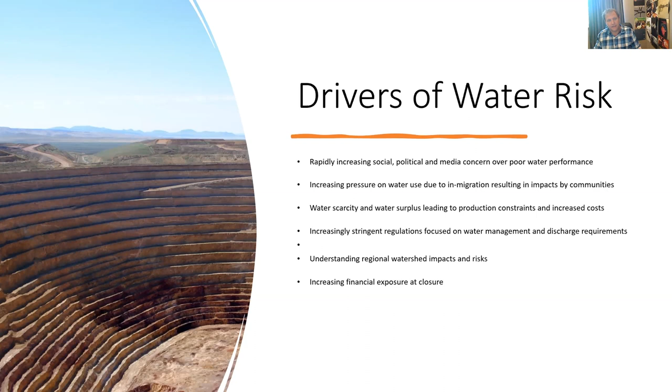So a big driver for this, I mean, it wouldn't be a conversation without talking about costs, but costs at closure in particular have escalated to unsustainable levels, or very challenging levels in most cases. And understanding those is something that we want a longer runway so that we react less. And reactivity is the killer. And I'm going to talk a lot about reactivity as I progress through the slides today.

Following that, what do we see in industry trends? Well, we see a shifting industry, especially in precious metals mining and other commodities. Perhaps we're seeing that shift in the regulatory space, but in our space, we're seeing a macro shift in the type of material, the type of ore that we process. We're seeing a shift away from oxide mineralogy into sulfidic mineralogy, sulfides in particular.

And we know that those have challenges related to the scale that we operate at and the environments that we operate within, or the locations and physical geographies. So we're seeing movement into places that have more challenges around surplus or deficit of water. We're seeing the sulfidic mineralogy impacts that affect water quality. So it's quality and quantity that we see as challenges.

So we need to execute a multidisciplinary approach. We know that it's a combination of strategic and tactical. The strategic elements look at the long-term way that we operate, but the tactical has to be backed up in sense and in science and in engineering in most cases. And we're seeing the need for greater technical capability with much more targeted tools that can help us to predict what the mitigations and engineering constraints might be.

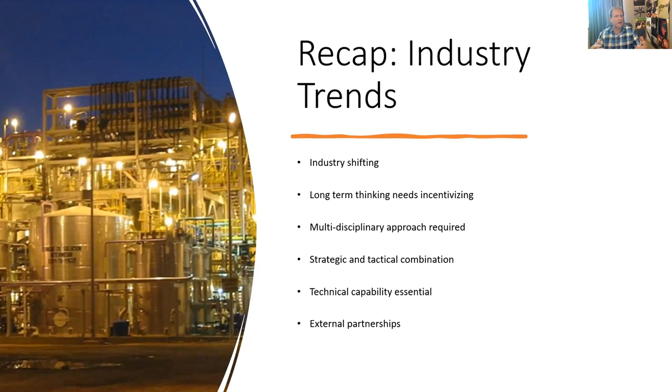So a piece here that I've added is around external partnerships. So we can't do it on our own as a mining company. And I'll talk a little bit about our strategy around what that external piece looks like and how we've come to develop some of the technologies that we've developed.

And then the specific parameters of concern that we're looking at: obviously metals and metalliferous drainage, saline drainage, those are things that we need to be controlling. Particular elements around nitrogen, ammonia, nitrate, nitrite. These often crop up as things that we need to solve for in our treatment strategies. Sulfates, it's been around about 10 years as a pretty big driver, and that's going to be one of the case studies that I talk about today, how we use membranes to solve the sulfate issue.

Obviously, very rarely do we see these things on their own, and so that's something I'll talk about from a strategic engagement perspective: what is the technology that you want to bring, you want to commercialize? Is it specific? If it's very, very specific, mining has a pretty wide range of challenges, and it's very rare that a very specific technology would be something that we would want to add. That's why membranes, as an economizer and a bit of a catch-all, are something that you would probably want to integrate into your flow sheet, because if you can treat things at lower volume, higher concentrations, that's always a win for us.

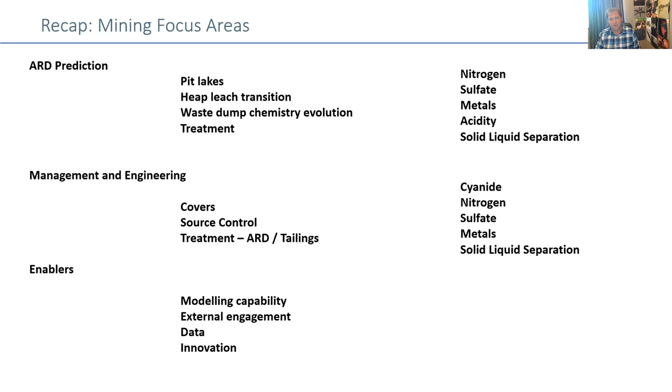So another couple of slides here around just cementing why are we doing this and where does it sit. We own the liability. So from an organizational liability perspective, these liabilities can be very, very long-lived and very, very expensive. So that's why we want to look very closely at solving the issues. And we want to look at it from a number of arrows in the quiver. An ounce of prevention is worth a pound of cure. That's on my next slide. But those are the elements that are really important to us, and that's some of our guiding principles around how we look to minimize, and then if we're going to treat, what's the innovation and what does it open up for us in terms of the opportunity to both make money and, at the same time, develop the business.

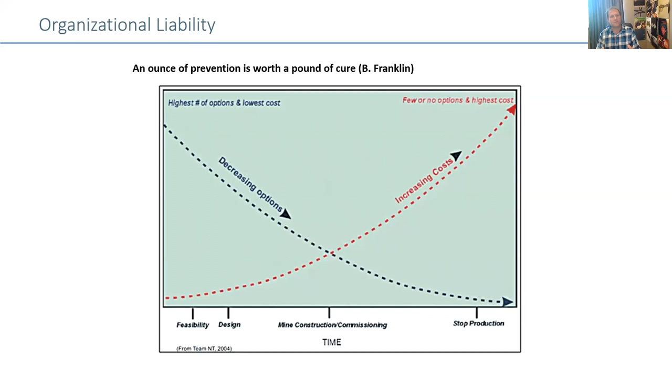And here's a pretty typical cost curve that drives us, and like I spoke about at the beginning, what we see is these rapidly increasing costs later in mine life and in closure. And in those locations, we don't have the economic models in place to be able to adapt to those increasing costs. So it's just cementing that recap here that this is a significant driver for the business. There's a lot of opportunity here as well, but those targeted areas, we've got to be focused on what they are and how they affect our business.

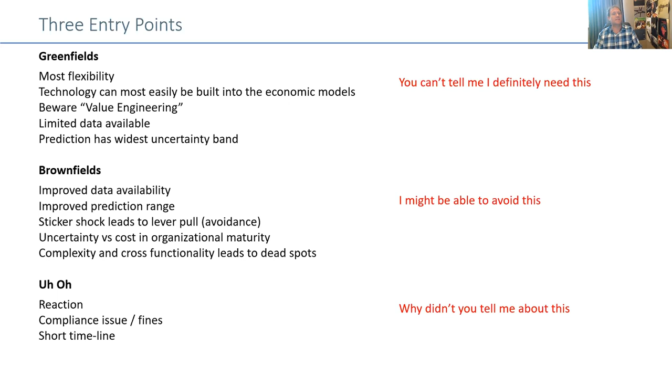Then brownfields, I might be able to avoid this. I don't want to be the one to pick up that can. Somebody else didn't pick it up. What are my off-ramps here? How can I get off this track and minimize those costs? And then the last one is, well, hang on a second, I didn't know about this. And that's a real difficult one, because often the messaging or the communication pathways aren't there. So again, coming back to my function, making sure that we're consistent and persistent in the way that we approach these things.

So the next one here is really just taking those concepts a little bit further. Water is not our core business. We're going to find those off-ramps. We're going to find those minimizations. We're going to take time value of money and we're going to delay. Those are the ways that we have a challenge. So what I'm trying to explain to folks is find your ways in and develop your expectations of where it might work.

Coming in at the end, I think, is where a lot of folks saw opportunity. Wow, there's companies that have got huge problems here, and our technology can slot in some part here, and we're going to be able to hit go and get it done really quickly, and we'll make tons of money. That is the last resort, and is not a good way of doing business. So yes, that has happened, but I think people came into the business when there was a lot of consolidation in the water industry, expecting that to be the way forward, but not understanding that in mining we've got to rationalize these things and make sure that we're doing the right thing.

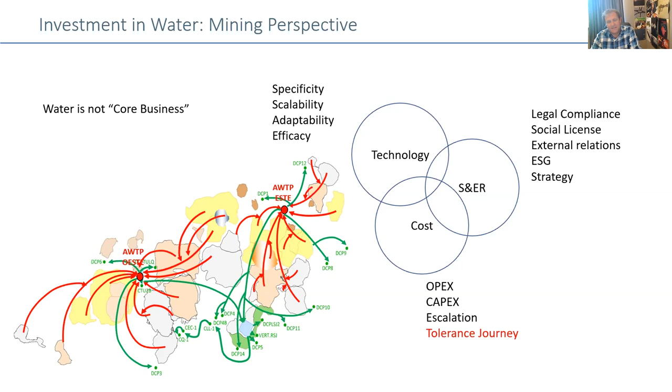And then what I alluded to previously is where is this company at in terms of their tolerance to those costs? The point in the middle here, the intersection of all of these, is the ideal situation, but we very rarely land there. So what's that journey? Well, in the beginning, we might have an S&ER goal, and then that leads to a technology interaction. So we go, well, where do we fit there? We can find that spot, no worries. Depending on the project, cost isn't really considered at that point.

But as you move forward, the technology and the costs start to be considered, and you start to value engineer, and you start to think, well, what do we really need to do? What's the minimum that we can do here? And then when we get to the certainty end of things, what typically happens on that far end of the scale is, if you do take the off-ramps and try to avoid and take advantage of delays, eventually S&ER always wins. You've got to meet your obligations, legal or otherwise, or in our case, our internal standards.

And that's where there's a significant interaction with cost. What I've said here on the right-hand side is, at the end of the day, our obligations always win, and then cost isn't necessarily a driving force. The picture I've put here is one of the mitigation strategies that you might see in the mining industry, where we can cover the material that's causing the issues. That can work for a significant period of time. Whether or not that is acceptable over the longer period is a different question. But those are some of the things that we might end up doing.

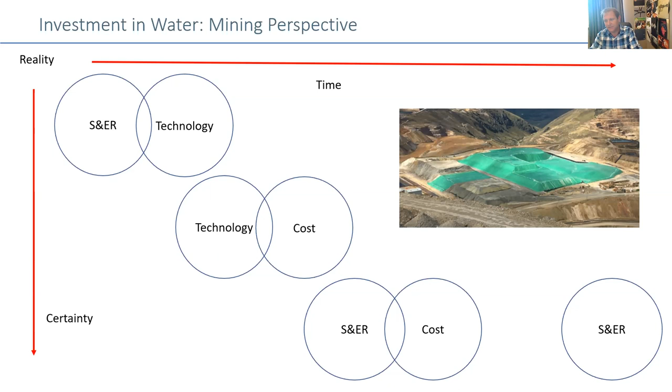So when we start in a project and we go, right, what's our tolerance? What's our feed water quality? Where are we at? Often we don't have that level of certainty, and you see this evolution, this development, and then this escalation. And that's when you've got to understand how we manage that in terms of the development of the technology. Again, to reiterate, multiple off-ramps.

But the off-ramps are pretty clear, right? Industry macroeconomics: we've got changes in gold price, precious metal prices. That can change the economics of what your whole project looks like. That can end that project or make it substantially different. Production elements, restrictions, those elements as well. Closure: we can develop closure cost estimates and understand that might not be something that we want to tackle. And then obviously cost.

And then another one here is regulatory relief. There may be elements there such as site-specific water quality parameters, permitting, working with our regulatory stakeholders to make sure that all of those things are taken into account. So that's a bit of a journey to how we innovate, right? Or how we bring these things into the business.

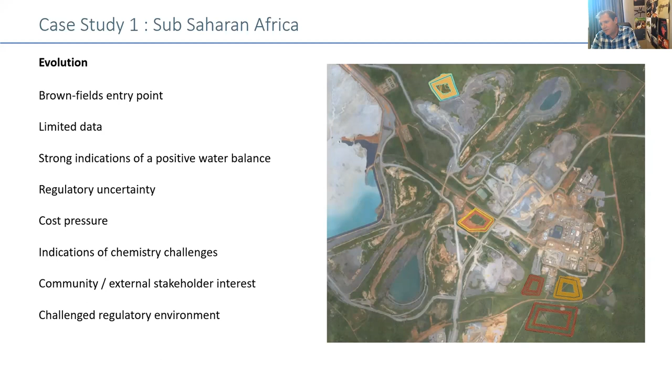So in the development of the process here, we took a few off-ramps. We engaged consultants. Consultants didn't really have that connectivity into the business. So that's why, and that's where I come in as well, is making sure that we own these outcomes. We're accountable for this stuff, and we can then get the consultants to be more useful to us rather than them coming through and trying to solve something that we ultimately don't like the answer for, or we have the ability to ignore. So Newmont says, no, we're going to have that internal accountability for this.

So that's where we developed that. We got a lot better through that process. So we didn't have that cohesive strategy at the time, accompanied with lack of data and a lack of detail. It made it very difficult to make investment decisions. And then the investment system was in its infancy and was being developed. So we started moving water around. We challenged the regulators on a couple of things. We reworked some assumptions, and in the end, the problem didn't go away. In fact, it got a lot worse, and that's where reality sort of hit us.

And we had to deal with some permits. They weren't necessarily withheld, but the permits, they said, well, you're not really demonstrating that you're fixing this issue. Now, we didn't have anything that went beyond the fence, and we didn't have anything that required fines or anything of that nature, but we were able to manage it internally. And then we became very clear that we were not going to be able to manage it for much longer.

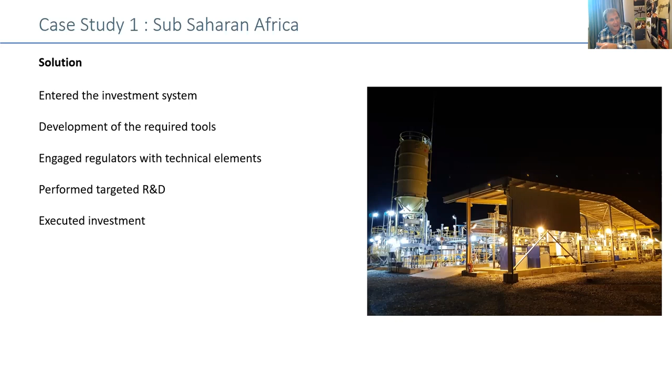And we're solving that issue with cycling up RO brine and things like that that are typically considered to be a bit risky. So we've got a lot of credibility out of it too. And now when we engage with the regulators, they know what we're capable of and how we can do it.

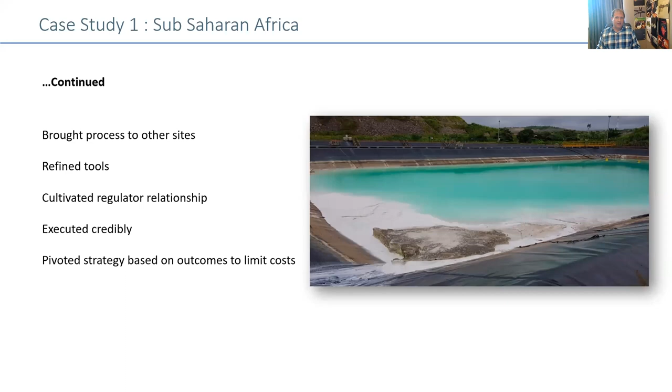So directly pivoting on that. We had a very similar situation at a site in the same area, but we developed the right tools. We knew what we were facing. We collected the right data, made the right predictive elements, cross-functionally worked with everybody. We tracked our performance after we executed the fix, which was a new strategy that takes those larger fixed plants and pivots to mobile plants.

Now, we could never have put mobile plants in if we didn't build that fixed plant in the beginning. So now that's that scalability. Now we can scale these things as needed without having to spend huge dollars, reacting to the cost pressures that we have in the mining business because it's not core business. So that's what we did. We could see that we had this very, very high rainfall year. We were tracking very, very high.

We implemented a mobile RO system, and we didn't have an emergency. We didn't contaminate any water. We didn't have anything over top. We didn't have to load our TSF. We executed exactly as designed, and we were able to go back to the regulators and say, hey, thanks for your support and permitting that on the fast track. We solved it. Now we're good.

I'm hoping that the message coming across here is just how the planning aspects and that technical engagement in those planning processes and investment systems, just how important it is to get that right. So that's really where my point is, I guess.

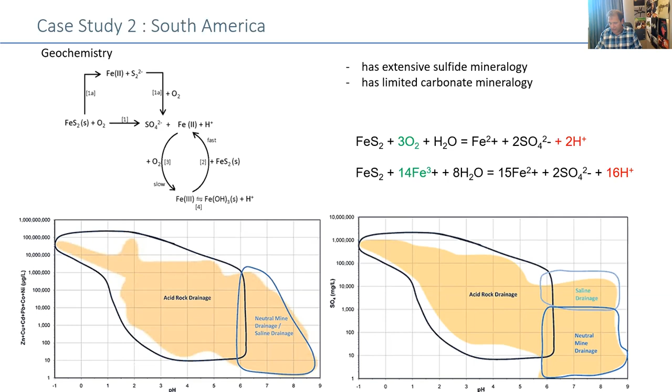So here's what we're sitting in with respect to the potential water quality that we have, acid rock drainage and saline drainage. The fact is we've got to treat those solutions. So again, brownfields entry point. The site had operated without fully understanding what the potential was for some of the water quality elements and how they might evolve and where they might land.

So, same as the previous site, we were observing these things, watching them happen and just hoping that they would either stop or go away, or this was just an anomaly and it wouldn't be continued into the future. At the same time, we had a lot of regulatory change. So real compression of what we were observing and measuring and the regulations that we had.

Again, cost pressures are fairly ubiquitous, so the plants that we have here aren't going to miraculously make more money. So we've got to make sure that we can limit the costs and target the right technology here and be as adaptable to the future conditions and state as we can. Obviously there's a lot of community stakeholder engagement and interest in this location. And again, large scale, very, very large cost.

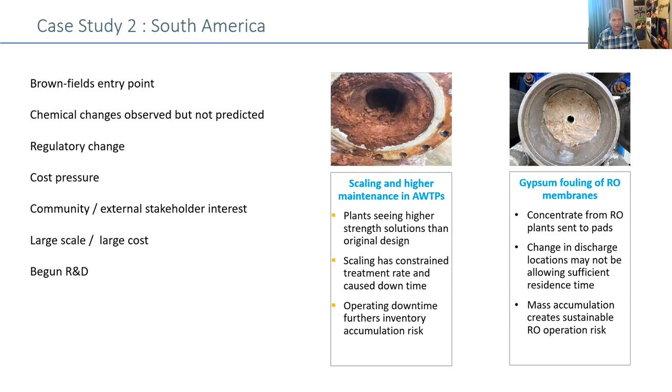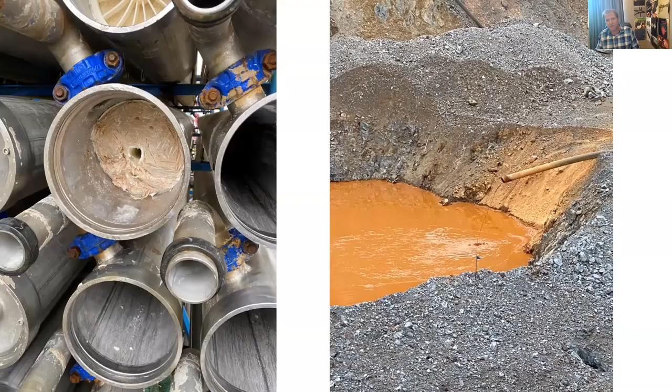So here's a few photos. Some of the sludges that have been produced as a result of this acid water certainly have an impact on our ability to manage water around the site. We've got to make sure that we're fixing this stuff. So there's a lot of sludge that's being developed. You can see lovely pictures there. You can see what the membranes are doing. You can see what happens when we can't get all the water out because we're constrained by the chemistry. Right now, we can seasonally manage this, but these are the impacts.

Anybody who knows anything about ARD can probably predict the water quality that you can see in those photos there. So next phase, development. We enter the investment system. We largely entered the investment system not because of the problems that we were seeing, but because new projects required changes to those water management and water treatment systems, and we knew that adding additional resource to this site would require changes because the systems can't tolerate that expansion.

So we knew what it needed to be, but we didn't realize at the time just how much we had expanded beyond the capabilities of the existing system and how close we were to not being able to manage water effectively. Again, lots and lots of consultants involved. The consultant go-around, everybody's doing all this work, but no one's really got a cohesive strategy here. So that was a bit of a challenge to pull that back and get that on the right track.

And then looking at operational elements. So we were seeing these sludges turning up. We were seeing inability to meet our water treatment KPIs. So we were band-aiding a lot of that, and some of that made things a lot worse. And then we weren't engaging with what those fixes were and what the changes meant.

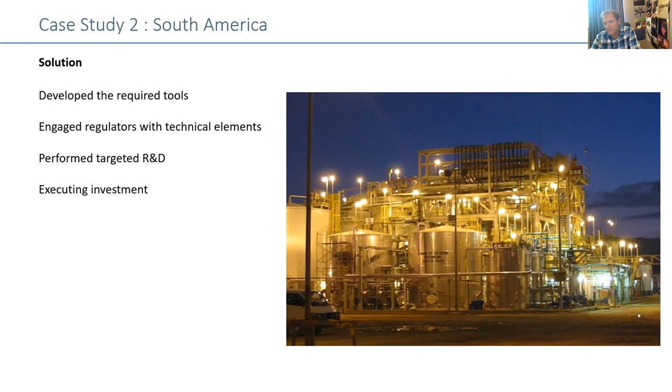Are you flexible, scalable, and adaptable? How does that work? Are you market ready? Do you require development? If you require development, probably going into a site isn't the right place to go. Coming through the innovation pipeline is probably a better location. And then what's the level of specificity that you have with regards to those focal points and the tolerance to the costs? So where are you at?

So on the right-hand side there, you'll see there's a photo of me and a lab manager down in Peru operating this acid RO plant. And so I'll leave you with that.

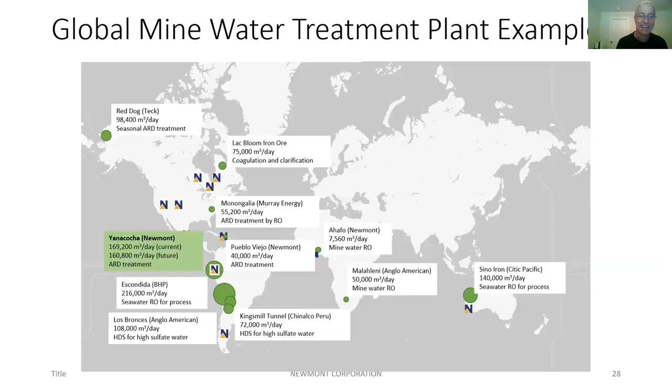Well, Jay, can I ask a specific question? In one of your slides, you just snuck past what I thought was a horrific, exciting image of a membrane pressure vessel and some cement and chisel marks on it. Was I seeing that correctly? Yeah, you were. Oh my God.

So for those of us who have had the unfortunate pleasure of dealing with this before, that membrane there, and everybody knows this as well, right? You try and rip those membranes out of there that are glued to the inside. You start streaking and damaging the inside of those vessels, and you can have all kinds of things go wrong.

So there's stainless vessels in this particular location, but that membrane there weighs 36 kilograms, goes in at about 8, and it's all gypsum. And we tried really hard to get that one out of there, and we ended up having to put, I think it was a 40-ton come-along winch to get it out. So yeah, that was a bad day.

Well, it's a bad day, but the one thing that NAWI is investing in is better geochemical models, ways of doing a better job of predicting. So not to completely ruin your afternoon, but was this an example of just not running a model, and in hindsight you probably should have run that and seen just how far into the gypsum curve you were? Or is this an accident that happens because the model said you're all clear and you open the vessel and it's full of gunk?

So let me give you a real quick answer. I don't mean to go too deep into technical. I'll keep it as light as I can. But this system here, Yanacocha, and I just gave away the site. We saw from your map. We know. Yeah, we've been operating membranes for about 25 years. So we phase membranes in.